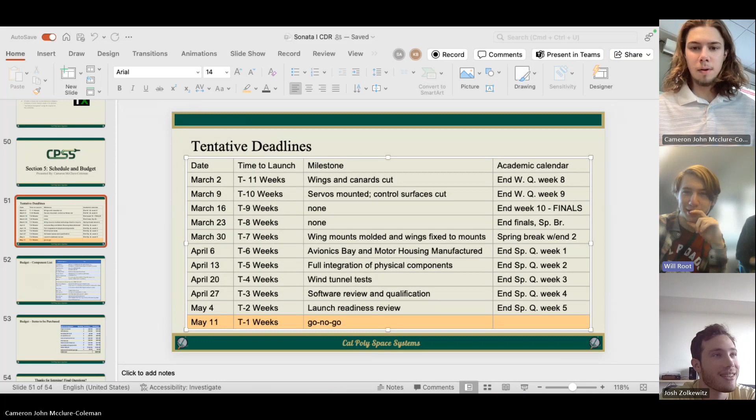I think so, yeah, can you see the PowerPoint? Yeah. Try hitting that present, like the sharing correct button. Here? No, bottom, on the bottom, it's like the one next to, ah, the book. Yeah, that one. Ah, there we go, cool.

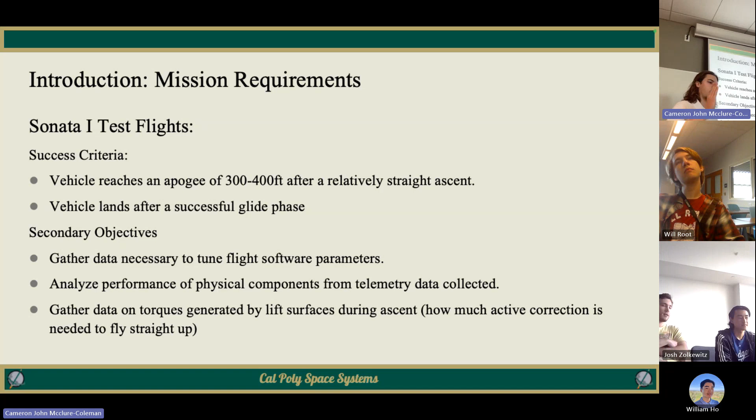Because if we were to put that on a rocket, we'd then have to generate extra drag by using our active control to stabilize it.

The idea is, background on plane versus rocket: for a plane, you want your CP to be closer to your CG. For a rocket, you want it to be further away, because when you're going up you want it further behind. So we're shooting for that on the way up, and then hoping that it will come back far enough that with the canards we can kind of cancel out how far away it is from the center of gravity.

By having canards so far forward, we can then pitch up with control surfaces on the canards when needed to maintain stability while in flight. But obviously we'll have to do testing of that, which we're hoping to do in the wind tunnel first, and then launch it with the actual rocket once we've confirmed that we can control it.

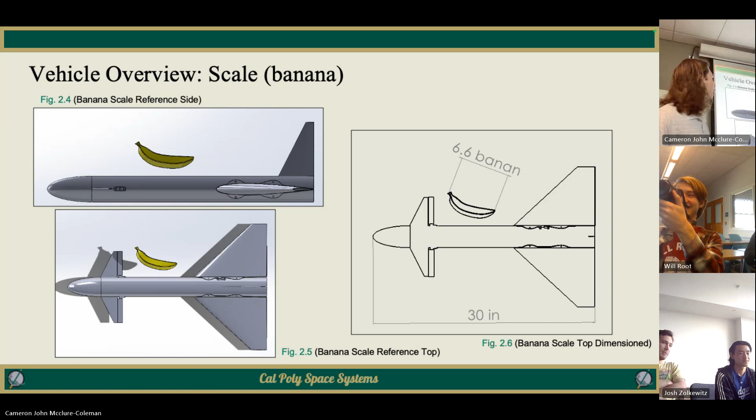Oh, I like how it puts a shadow in there. That's so cool. That's very cool. Oh sorry, you want to get a picture of that slide? Okay, great content.

Okay, vehicle overview. We covered this in the PDR, but we have some changes here that we'll go over again later.

Same as before, while on ascent the flight software will be configured to maintain our trajectory as straight up as possible. Hopefully we'll be able to have hands off the sticks, and then ground control station is just observing the video and spotting to make sure it's not going to die. And then electronic systems function as normal, so we'll get telemetry, video feed, data logging, all that.

So this brings up a question: is your flight software going to be able to handle both automatic guidance and then controlled input guidance? Yeah, so it's not automatic guidance as much as it is just stabilization. Just in case anybody is listening, it's stabilization, not guidance.

And I think what we're planning on using, I'll talk about in the flight software slide, is a software called ArduPilot. That's just firmware you can load on, and there's already libraries and stuff to support the flight controller we're using to do all that automatic stabilization. I'm not sure if it will transfer to going vertical, so that might have to be a custom plugin to make sure it can do vertical stabilization.

I would definitely be careful, because rocket stabilization is going to be a different control problem. Yep, it's inherently unstable.

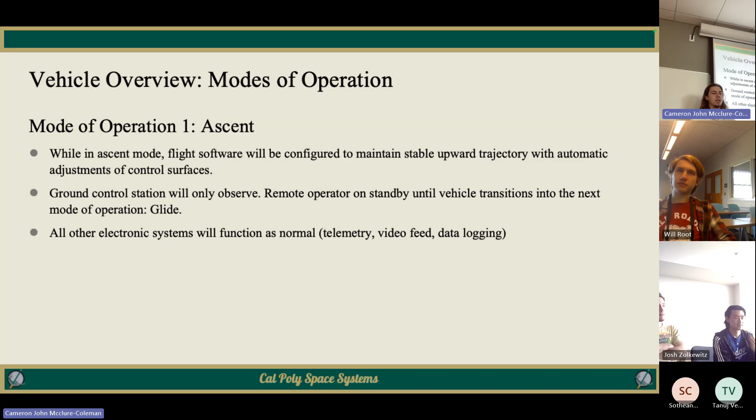The idea is that you just have it run the active stabilization in an upwards mode, and then you flick a switch into the normal glide mode, and then it uses whatever the normal active stabilization is that ArduPilot comes with, because it knows how to do that for planes and I don't.

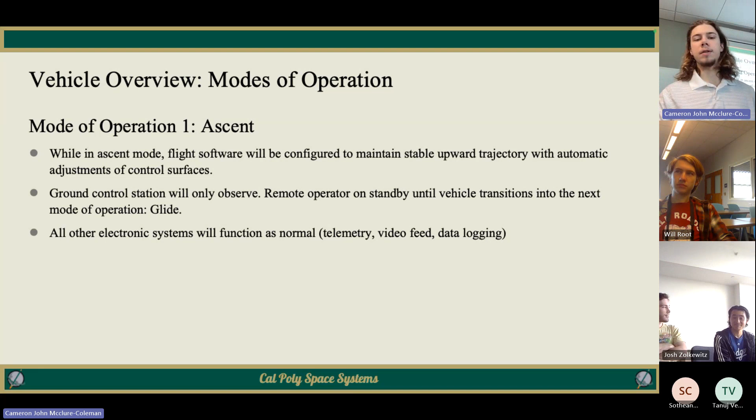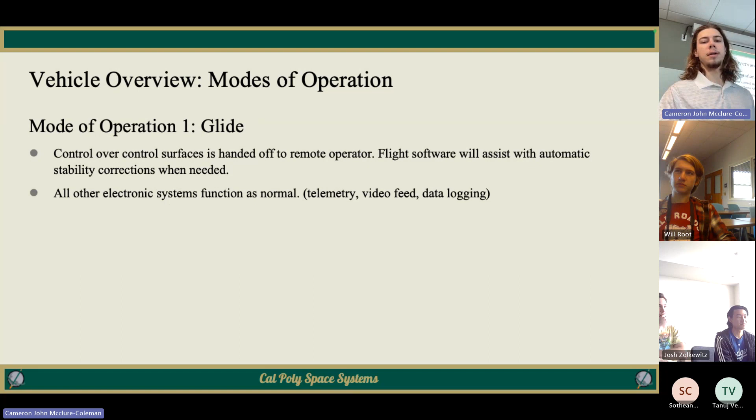Then the second mode of operation is glide — same thing, just a human in control now from a remote location, probably in a bunker.

Concept of operations is the same here, except last time we had an optional 'if we lose control, parachute deploys.' We ran some numbers — and we'll talk about this in a later slide — but if we're only getting up to about 300 feet, and the furthest away we'll be is about halfway down when we're coming in for landing, we'll only have about 100 feet to deploy a parachute. We figured it's not worth adding all that weight for something that may or may not actually save the rocket.

We'd rather just put everybody in a safe location. And if it crashes, it's under 3 pounds — it won't damage the tree it smacks into. So the environment is safe and we'll make sure the humans are safe.

We'll cover it a little bit in more detail. Basically, pad idle: we confirm that we have all the links we need over radio, confirm that range is clear, declare go for launch, and then ascent.

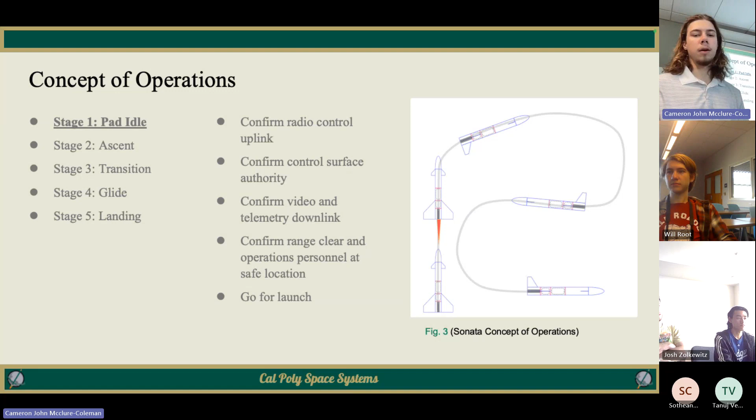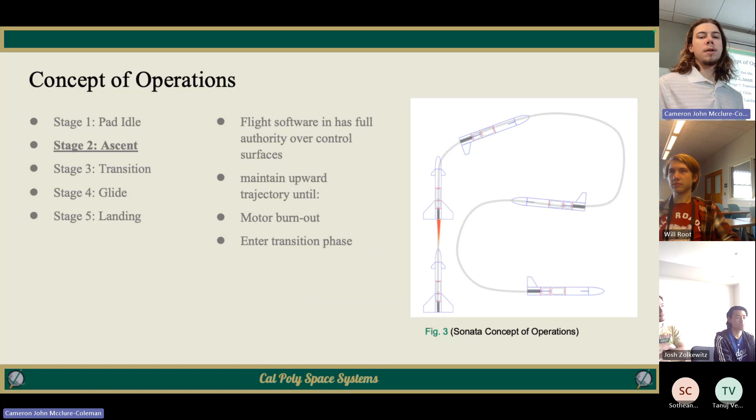For flight software and control, as I was just talking about, we maintain the upward trajectory until motor burnout, and then we enter the transition phase. The idea is to coast until we reach a safe airspeed to start maneuvering into glide conditions.

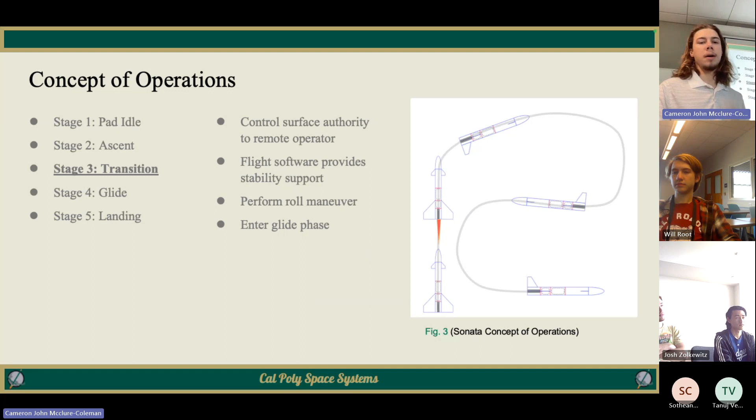That would be around 60 feet per second, we thought. Obviously we'll have to do some testing of how fast the airspeed can get before we get unstable, in the wind tunnel.

Then we go to the glide, maintaining under 50 miles per hour, which is what we're thinking will be safe in order to land it. That's what we're assuming — we'll obviously have to test that because we're not confident in the software fully, or that we were using the software correctly to determine that.

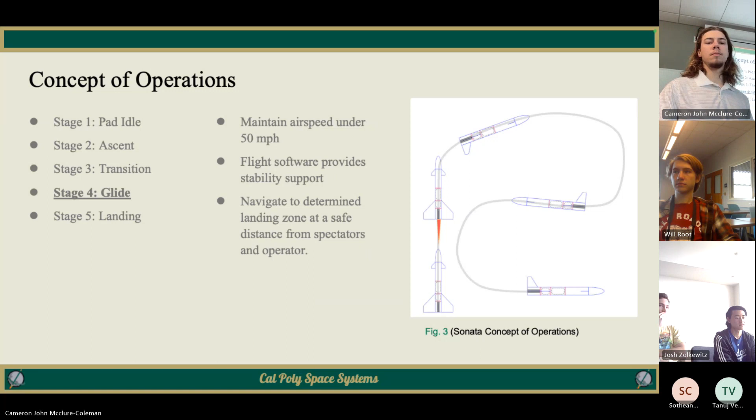And also, our manufacturing tolerances are definitely not going to be exactly what we've designed in our models. Then we glide to landing, and hopefully power down, recover — mission success.

Yay! All right, moving into subsystem overviews. Oh, question — sorry, move on. Yeah, I know. Yes, like what exactly?

We have a test matrix that we'll show for the wind tunnels and for launches, and then we'll also talk about that further. I have a schedule slide for our tentative schedule, and we'll talk about why it's tentative as well. So we'll go over that.

Here's our agenda for subsystem overviews. I will hand it over to Kyler for lift surfaces and control surfaces. Thank you.

Do I just use the arrow? Yeah, okay. Space works too.

Okay, so this is basically the same as PDR right now. We still have the same delta wing design as the old booster, same ratio that we're keeping for the shape. We decided on 2 wings — one symmetrical, and then we're gonna test a non-symmetrical airfoil to see if the auto stabilization can control that, which we'll also test with the wind tunnel.

I'll show this in the CAD, but basically it's the same as the old Starbooster. The wings are placed at the base of the booster for maximum stability, and then canards are ahead of that towards the nose cone. This is the symmetric airfoil we're using.

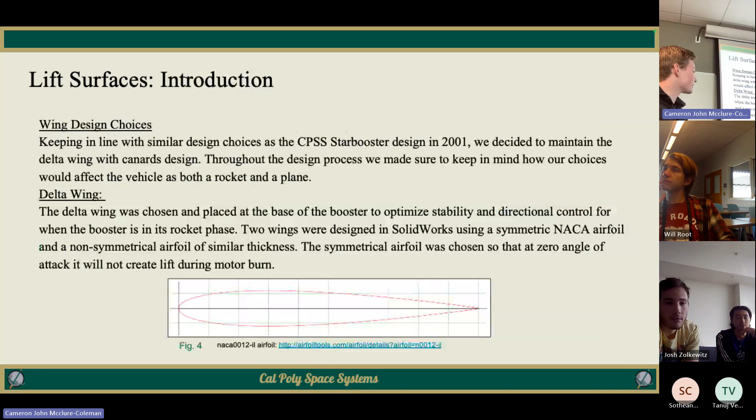We're trying to glide at around 9 meters per second, so I figured the safe stall speed should be below that. So going with what NACA gives for the coefficient of lift, and then the maximum angle of attack.

The wings are sized at around here. So basically, we're going for a stall speed of about 2 meters per second slower than the target glide speed for the symmetric wings, and a good bit lower than that for the non-symmetric wings.

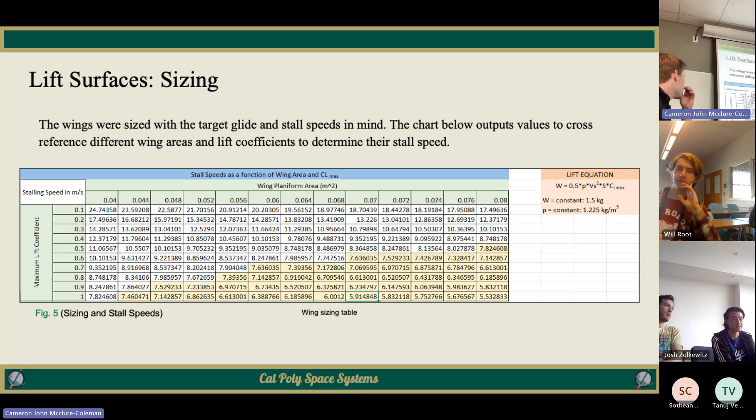I really like the analysis of finding the stall speed, but it might have been better illustrated in a graph. Also, the meters per second -- I know you put miles per hour earlier, and yeah, probably should aim to keep that constant. Okay, yeah, sorry, we probably switched the units around, but it's all the same thing.

So this, I didn't skip one. No, this is the non-symmetric airfoil. So here's all the fancy numbers for it -- basically coefficient of lift and drag for 5 to 10 degrees angle of attack.

There's the CAD model of one of the wings, and then the coefficient of lift versus the angle of attack that's given on the NACA website.

Is that surface area, planform area, or? Planform, yeah. That's the other reason -- I don't know, like 53.4 inches squared is meters squared, so between the two graphs it's hard to tell. I know, units, we should probably switch that up and make it all constant, but it's the same thing.

So yeah, again, a symmetric airfoil was used so that during launch it shouldn't tend to peel away. This would be the easiest way of doing it.

And then I calculated a rate of descent of about 0.52 feet per second. Realistically it's probably going to be a bit faster than that, but that's pretty good.

This airfoil we picked because I'd originally picked a thinner one, but after talking to DBF people, and then after PDR, we went with a thicker airfoil because it will probably be manufacturable, as opposed to the other one which we'd have a lot of difficulty actually cutting out.

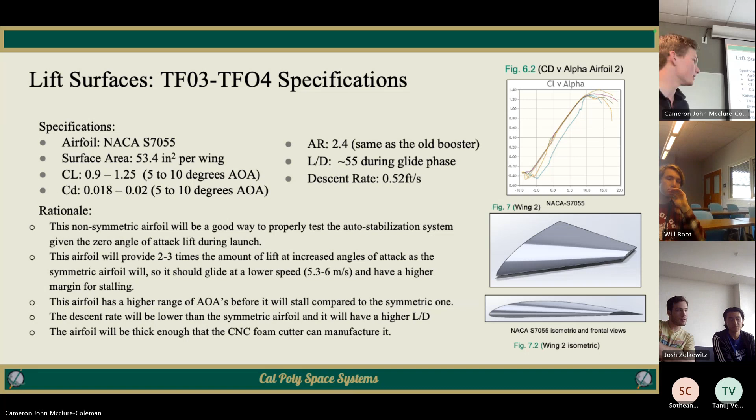Are we building 2 vehicles, each with one of these wings? No, just one vehicle -- I think it's on another slide -- but they can be attached modularly.

This is a wind tunnel test matrix we have. I didn't want to put so many words on here, so this is a general test matrix. Basically we're going to test the symmetric airfoil mounted with thin canards, and test drag, airflow over the wings and canards, and lift created with different elevator deflections. We're also going to do another test, but the original canard design I had would be too thin to manufacture, so that would probably just end up being a wedge.

But we also want to make thicker canards with an actual airfoil, though we aren't exactly sure how thin the CNC foam cutter can go. So after talking to DBF and figuring that out, we're going to make a thicker canard with an actual airfoil, but I'm just not sure how that would interfere with the airflow over the main wing.

That's something we want to test in the wind tunnel. Wind tunnel tests 3 and 4 are basically the same thing as the symmetric airfoil, but with the non-symmetric one.

The main points we want to get here are drag, and for the non-symmetric airfoil, lift created at zero angle of attack, and seeing if the control surfaces can overcome that -- so that active stabilization could actually keep it straight, as opposed to the control surfaces not being enough to overcome the lift during launch.

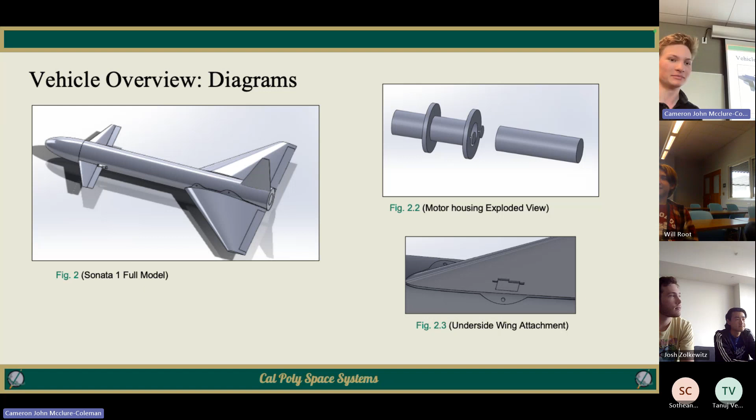Oh sorry, for that, that's like 50% to 100% of the wind tunnel speed, not our actual speed. And I was just gonna try to fit a curve to that. Gotcha, all right, makes sense.

Would you do something to try and, I don't know, maybe scale up your test model in the wind tunnel so that even at lower wind speeds you can still try to get a bit more information out of it? What do you mean, scale? Like make a bigger model, just so you can keep the Reynolds number the same, and even with the lower wind speed, try to predict what it's going to be at faster speeds for a smaller model, if that makes sense.

Well, I don't think we can make it much bigger because the test section of the wind tunnel is not massive. I think our rocket will fit in the wind tunnel, and that's about as big as we can fit. Got it, okay, that makes sense.

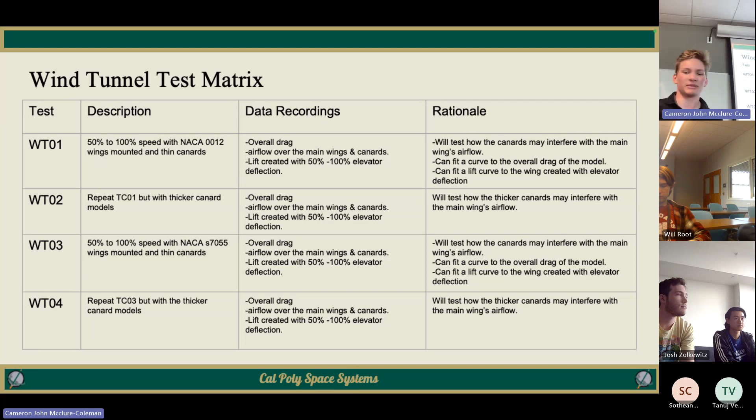Yeah, because I guess the main question is what the Reynolds number difference is going to be. Are you going to be able to match the Reynolds number and create flight-like conditions you'd expect to see in glide or in flight? It's probably not going to be perfect, but it's something to know, like what Reynolds number you're going to be running at versus what you're expecting to see in flight, and then what Reynolds number you're actually testing at, so you can at least see where your discrepancy is going to be.

Okay, yeah, I was definitely hoping to get some help on the wind tunnel stuff because I've never done that before.

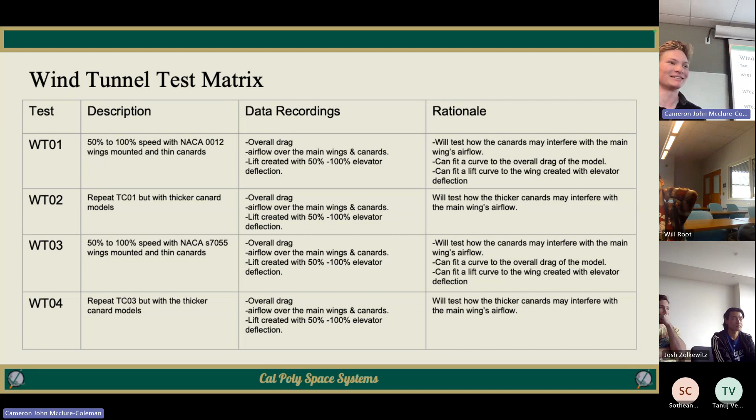And then again, launch test matrix. I realize this is kind of wordy, but the data recordings are just copy paste the same thing. So we're gonna do 4 launches, 2 for each wing configuration.

We're basically just testing launch without active stabilization, and then launch with it, for the symmetric, and then 2 launches for the non-symmetric airfoil. One launch to basically gain some data to see did the stabilizing work, and then we might need to tweak it and try again.

And then we're gonna record maximum apogee, maximum launch velocity, glide speed, and handling feedback and flight time basically, and then we can compare it to open rocket, and that'll tell us if it's actually being very accurate or not.

Obviously, if it crashes, we will rebuild it and then fly again. That's the plan.

Yeah, and then a brief overview of the other lift surfaces. So the canards were again sized pretty similarly to the old booster. They're about 15% of the size of the wings.

And then yeah, this is just saying about what I was saying about manufacturing them. So we're gonna make basically a wedge, and then one with an airfoil.

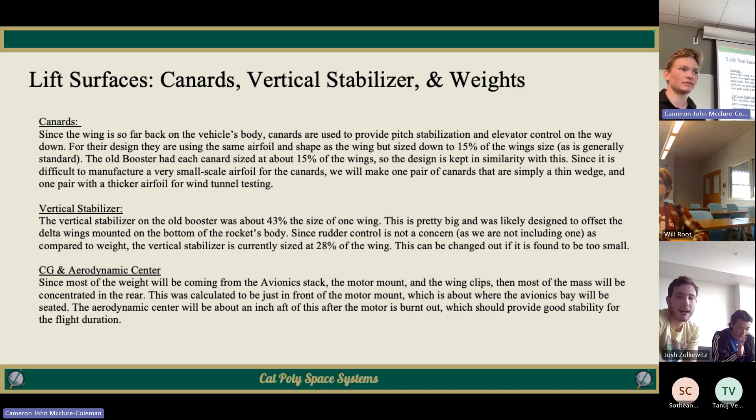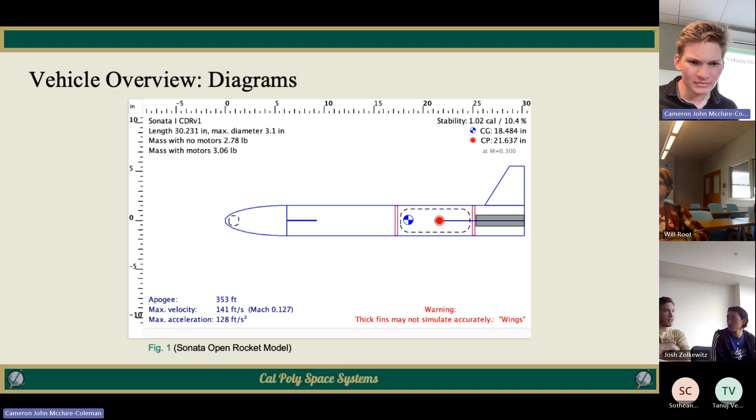Do you have a large... what's your percentage of the master rocket weight? It's like, again, under 300 grams is what we were limited to, so it's pretty small. We go from 3.06 pounds to 2.7 pounds, so I don't know what the percentage of that is, but yeah, it's not a lot.

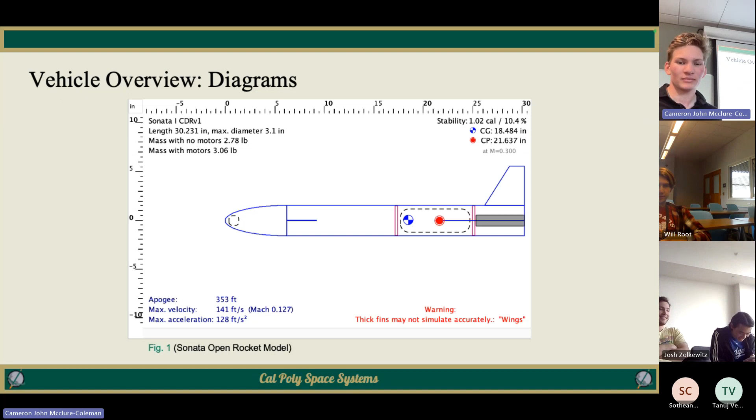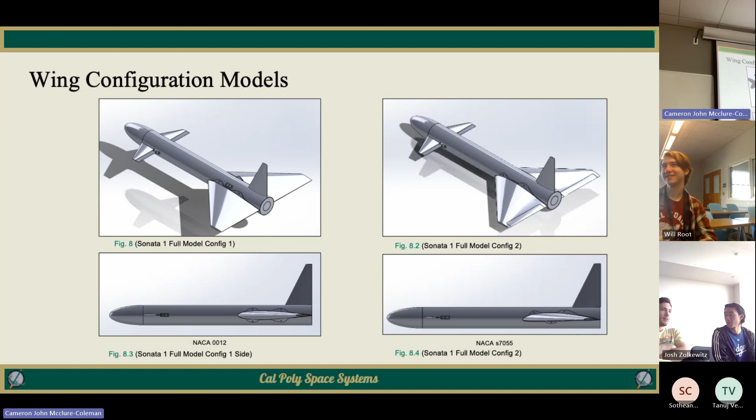And then here's just an image of the CAD models of the two wings. I think we have slides going on, but basically it's just, we're making wing mounts, so ignore the servos in here, they're going in the wings. We're making these fiberglass wing mounts that we're going to attach to the wing so that we can screw them on.

And then we picked these servos because they recommended we use metal ones, since they kept having gear shearing issues during the old Star Booster. So basically, the smallest servo we could find within our price range that had metal gears. I also picked them based on this RC plane servo torque calculator, which for our purposes ended up showing that all of the servos create way more torque than we would really need.

But yeah, so we're going to stick them in the wings because that's the easiest way to connect them to the control surfaces. Cameron has a model RC plane and it has attachment points. I think you're talking about that for the wiring, but that's what we're going to do.

So the ailerons are about 12% of the size of the wing, and the elevators are 20% the size of the canards... that's again similar to how the old Star Booster was. Also something we're going to test if that's good or not with the wind tunnel. And then we've already talked about controls a lot.

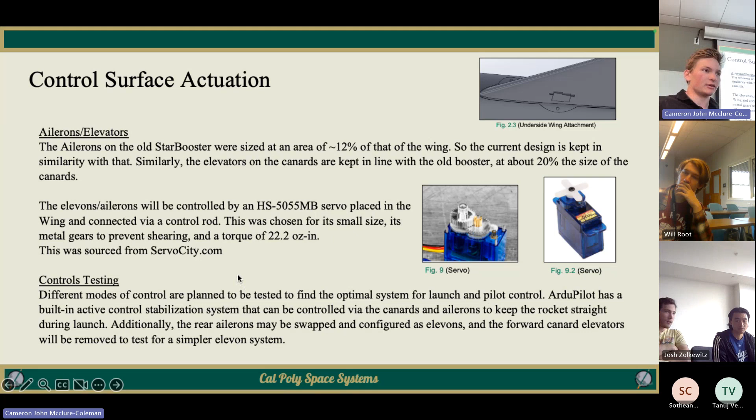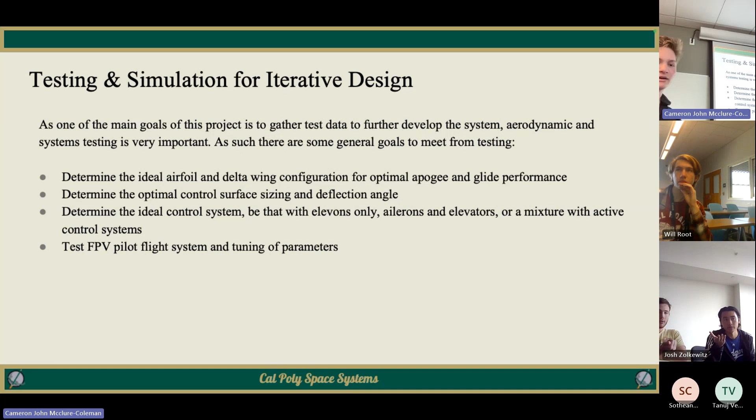Testing different control systems that ArduPilot has to support. And then this is just the servo torque calculator. Basically a summary of everything I'm saying with the testing. So overall, to decide from our testing: pick the ideal airfoil and delta wing configuration, optimal control surface sizing and deflection angle for that, and then the best control system. Not on here, but I guess also to see how accurate Open Rocket is, and then test the pilot system.

Okay, yes, the servo, this... this is basically just a calculation to decide how much torque you need the servo to generate, based on the size of your control surface, how much the control surface will be deflecting, and how many degrees the servo will turn.

Is that 8.5e-6 just to take the centimeters to the fourth times miles per hour, or centimeters cubed times miles per hour? Probably, I don't know, I didn't make this. Oops, I can't go at it. I didn't design this equation, but looking at it, probably.

So are you citing that based off of launch or based off of flight? Launch. Okay, so are we expecting to actuate the servos during launch? It doesn't seem like we are, so.

Well, if the active stabilization is going to be used, are we gonna use, or even use the canards? That was kind of assuming we use the canards. Well, sorry, I'm counting the canards as a control surface. Oh, okay.

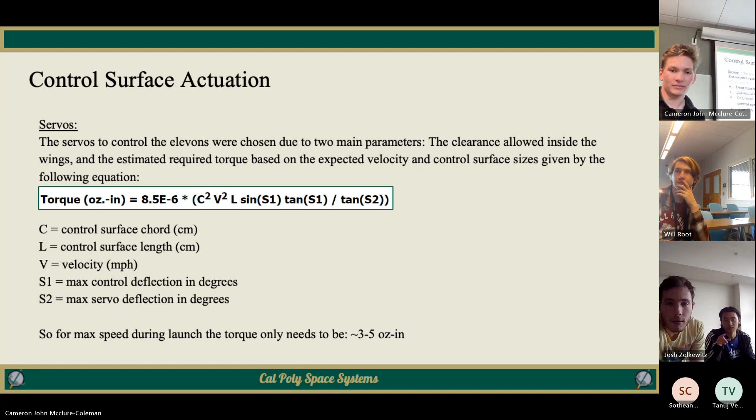But yeah, the full wing ones might be a little overkill for that, especially going that fast.

Yeah, for the airfoils, I was wondering how you got the parameters, like lift to drag ratio, lift coefficient versus angle of attack that provided. Wait, oh, that chart. Yeah, and the lift to drag ratio. Yeah, that's all on the NACA website. They just have that listed automatically for every airfoil. It's basically just coming from Xfoil.

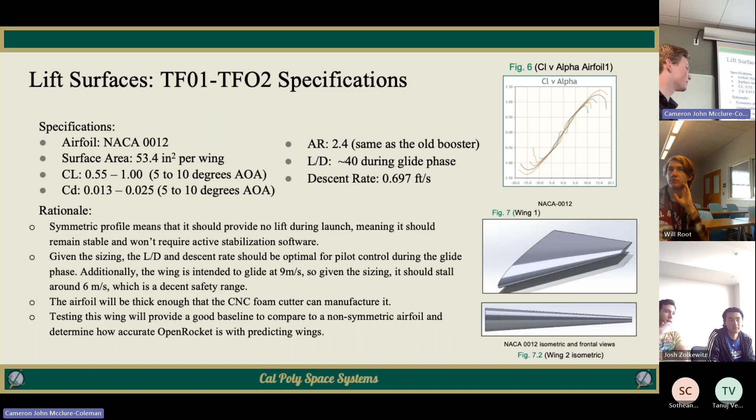Why does it look weird or something? I was thinking the lift to drag ratio seemed a bit high, but... Yeah, I think if you do that for the entire vehicle instead of just the airfoil, perhaps... no, that's just based on the airfoil, but for the entire vehicle, I don't know.

Well... how does the shuttle fly? That thing just falls. Okay, other questions? I don't know. Okay, Spencer, your turn.

Okay, so now on to structures and recovery. So we start with the main body. So just like PDR, we are still making it out of a cardboard tube, common in low-class rocket models.

It'll be around a 3-inch inner diameter and a 3.1-inch outer diameter. This is just what we're buying off of the internet, so those are their weird dimensions. It's kind of what we're left with. We're gonna buy a 3-foot long tube and cut it down to size.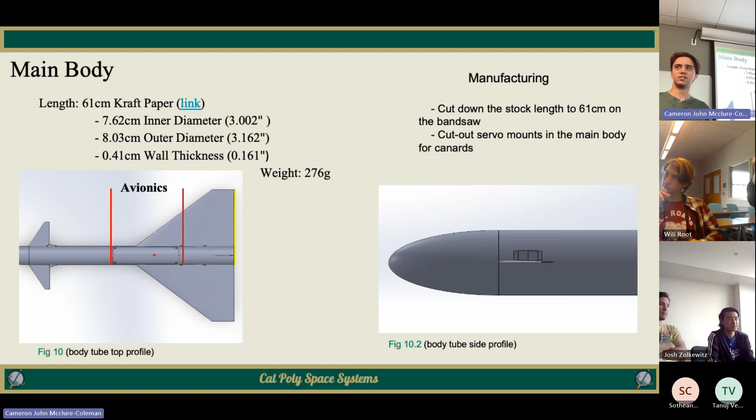Just kind of a sanity check, like you're probably gonna get a factor of safety of like 30 or something, wild. But just making sure that when you start cutting a bunch of holes in your tube, you're not gonna accidentally knock down your strength. Yeah, okay. We'll definitely look at that.

For our nose cone, it's gonna be around 15.7 centimeters, just because it's an elliptical shape, just for ease of manufacturing.

We're also deciding to put a mount for a camera inside the nose cone itself, since we plan on 3D printing it out of PETG filament, which should be strong enough as well. We need to do a little bit of calculations on that, but as far as we're aware, it will work.

And it'll be a lot easier to manufacture with that mount already attached so that we can just slip the camera inside. Total, that'll come around to 80 grams, 5 of which are the camera, so a super light RunCam camera that we'll talk about more later. We're planning on just making it out, and we can, if we need to, make multiple iterations of the design since it's really easy to manufacture, and just test and see.

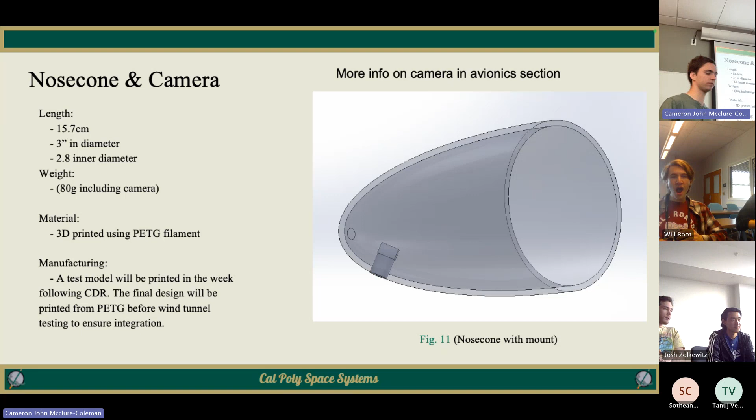We should. And also, from our camera, we'll be running a wire down the main body tube into the avionics bay to get that live video feed back down to the ground during flight.

For our wings, we are going to use EPS foam because we have that already, so we don't have to buy anything new. We're reinforcing them with a carbon fiber spar of about a quarter inch. We're not 100% sure on diameter or dimensions, but we have them around. DBF has a bunch, so we're planning on using some of theirs.

For manufacturing, we are making, as we said, two wing designs, and the canards will be the same on both iterations. So we're planning on using their CNC foam cutter to create the profile for both wings, which to our knowledge should be doable.

We did scale up the wings from PDR, so we're going to cut from a 1 inch thick foam stock down to about 3/4 inches at its maximum width.

Our wings are going to be attached to the main body with a wing mount that we'll talk about more in the next slide. We're planning on attaching the spar to that mount itself and then being able to slide the wings on and off for each iteration.

We're also going to be attaching the servos on the underside of the main wing, kind of in this picture over here. So we're going to run a wire through the side mount and along the bottom of the wing that will cut out into a little mount for the servo itself in the wing.

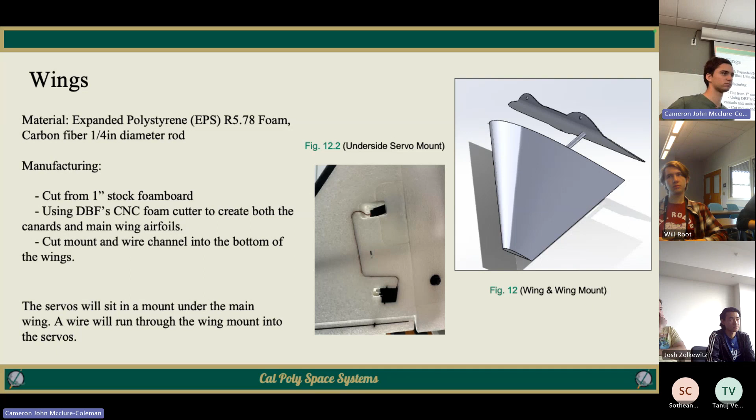I didn't touch that typo, but it's 1.5 stock foam board. More room to play with because the hot wire cutter melts quite a bit of the material, so we need more area to play with in the stock. But yeah, what we have already, so it shouldn't be any issue.

For the actual mount itself, after PDR we decided to change it to a fiberglass mount. What we're planning on doing is taking a 1/8 inch fiberglass sheet and heat forming it to the body of the tube itself to get that nice cut, and then cutting out our shape.

We're attaching it with 4 screws into the main body, and then the wing will slide onto this mount itself.

Are you just assuming you'll be able to screw into the tube itself, or will you have a nut? We're going to epoxy nuts onto the inside of the body tube so you can screw into those. So we'll have 4 of those on each side, plus additional ones for the canard as well.

Are you planning on cutting the fiberglass? Just cutting it. We could also do a layup, but it would probably be easier if we can get this cut with a drill.

Also, do we know if 4 bolts is enough? Calculate that, help us. The wing is very light, it's all foam, so it's not about the weight, but obviously they're...

So this is going to be pure shear, assuming... how big are your screws? Size 6. Yeah, this is like...

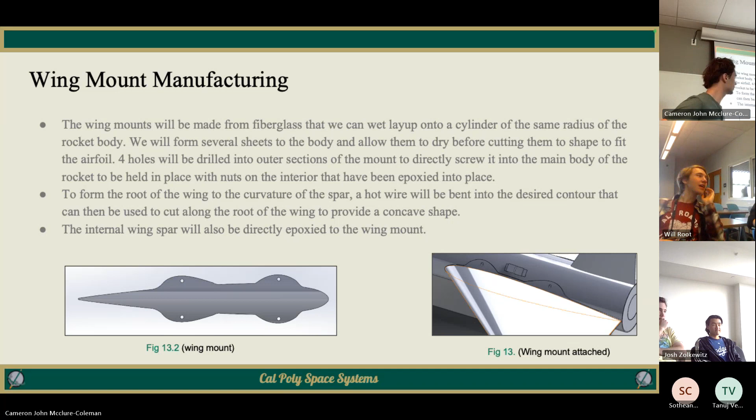For our avionics bay, which sits in the middle of the rocket, we're planning on creating a little hatch to access it from the top in case we need to change stuff out. Between both configurations, we need to change out the servo connection in the wings because we're changing the wings themselves, so we want access to the avionics bay in case we need to change anything.

So what we're planning on doing is having two centering rings on either side of the avionics bay, which is about 8 inches in length. Those are going to be glued down into the main body tube. They'll fit pretty exactly, and we're just gonna cut them out of plywood or something feasible we can drill or screw into, something lightweight.

Another thing with tolerancing, like... yeah, don't put 3.0 or... yeah, I get it. No, a lot of our tolerances and sizes are just kind of whatever ends up happening.

We don't expect, with our wings, we're not sure at all how much is going to be cut off with the foam cutter or how much to account for, so we're kind of just waiting to see what happens, and adjusting if we need to. I just did that because it's the same diameter, but in reality it should be a bit smaller.

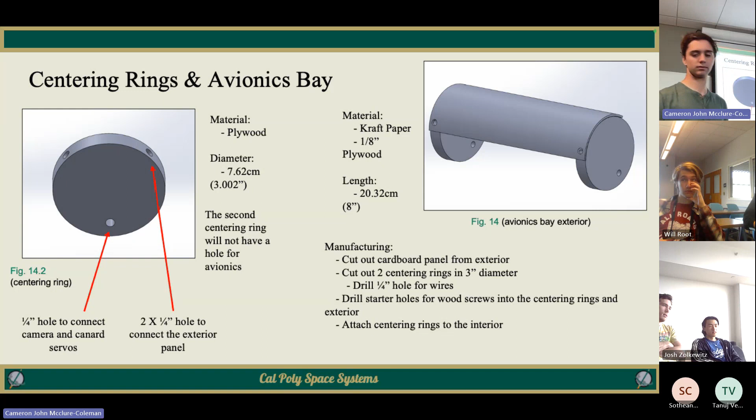For our motor mount, we have the motor itself and the casing that we're gonna be buying online. We want to make a little mount to slide into, because the motor comes with a casing at the front for a secondary charge, which you'd use if you wanted to eject a parachute out of the nose cone, but we don't need that for anything. It's still part of the casing we get.

So we want to just make a solid tube we can slide it into, and put a centering ring around that. We were hoping we could 3D print that as well, so this main tube and the centering ring would be all one structure that we can just slide in and lock in.

And then this ring here and these screws or something to hold the motor in, just while we're handling it and stuff. During flight, the pressure should keep it in, but just in case. And during the glide phase, we don't know - I mean, no forces should be acting on it, but just in case.

Which motor are you using? I think it was in... that motor. Yeah.

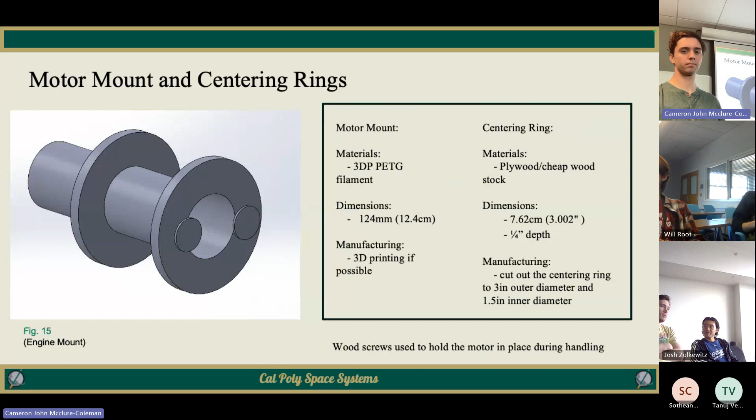So then, launching - we are still kind of deciding or figuring out where we're gonna actually be launching from, so it's a little up in the air of how we actually launch it. But one of our ideas is to stick it on what would be two launch rails. We probably only actually need one, but we want to have, if we're using launch lugs, them on either side of the tube, so we have two of them to account for when we land the plane again, because depending on where we launch, we could be landing on harder pavement.

If we land on the grass, it won't be a problem at all, and we'll probably just be able to launch it straight off the back with one rail. But in case we have to land on pavement, we want some sort of protection on the bottom to slow it down and grip, and also for more surface stability. If we're landing on one tube on the bottom, it's going to roll, and that pressure gets put on the wings.

We would try to avoid that. I'd avoid launching off two rails. We don't think we'll launch off two rails, but we think still launching like this, but maybe having something on both sides. Maybe you can just 3D print or epoxy on some skids, something aerodynamic, if that's a concern.

The main thing is that if you're launching off two rails and have any sort of thrust imbalance, you're going to start to bind your launch lugs. It's hard enough to line up two, and if you have multiple launch lugs, you have to align them axially and make sure they're radially concentric. That presents a lot of challenge and can add friction so you don't actually reach your stable velocity off the rail.

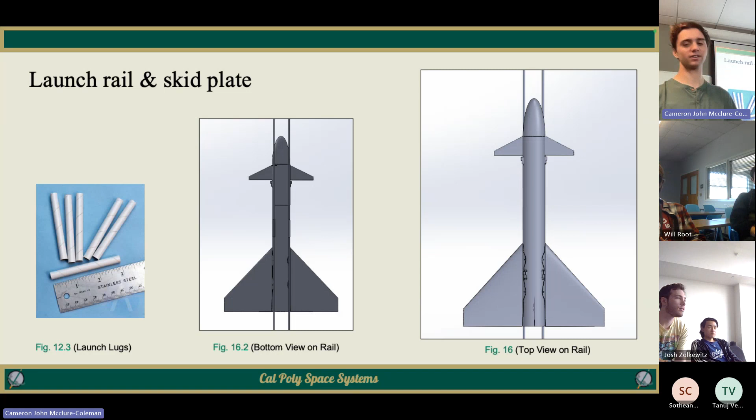All right, let's talk about the recovery system a little bit and why we decided to forego the parachute. From PDR, we originally thought the parachute would have to sit a bit further up from the back and launch either at the top or bottom of the rocket, since we couldn't fit anything next to the motor without offsetting it, and we didn't want to deal with that.

But after talking with some people and getting feedback from PDR, we thought it might not be super important to have parachute recovery, or that it might not even be feasible in the first place. As we stated before, our max altitude is going to be well below 400 feet realistically, with a pretty quick rate of descent — these are under ideal conditions, but it'll probably be very fast.

In most scenarios where we'd deploy our parachute, we're going to be around 100 to 200 feet above ground, and these are all scenarios where we've lost control of the vehicle. The deployment time and the amount of added mass just don't make sense. So instead, depending on where we launch, we're hoping to take shelter in a bunker or clear the area in the event we lose control. If for whatever reason it keeps gliding, it might go half a mile, but it's only a 3-pound vehicle, so it won't do too much damage if it crashes, as long as it's not crashing into people.

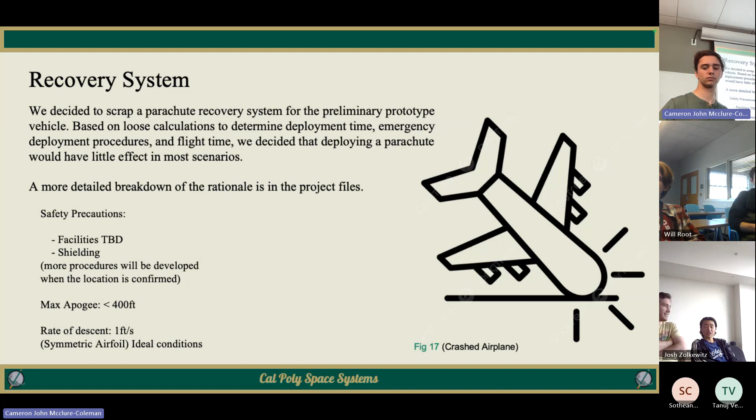There's more rationale and numbers on a separate write-up of why we decided not to include it, which you can find. I think that's the last slide.

Ready? Hello. Thank you, Spencer. This is just a picture we talked about already, so we can go over it a little bit again.

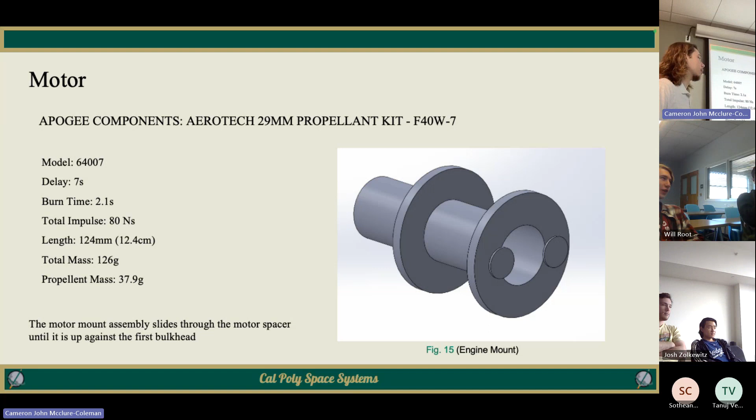That's the propellant there. It's like a reloadable kit you can put in and out of your motor casing, which we're also buying, or I think we have some in the hangar. We can use one of those, and we'll get like 4 or 5 motors in case one's broken or we want to do another test. Just load them into the casing and go.

Now I'm going to move on to avionics and radio control. None of this has changed since PDR if you were here, so I'll go over it quickly.

We're using this flight controller because it has all the pinouts we need for GPS, airspeed, and pitot tube, already preset, and it has the flight control firmware we're using, with a profile already set up in that software to control all those things.

I heard pitot tube—are you having a pitot tube? On the wing. We'll talk about that in one of the slides. It comes with a tube that we run out of the avionics bay to wherever we're mounting it, which will be on the wing, making sure it's outside the boundary layer.

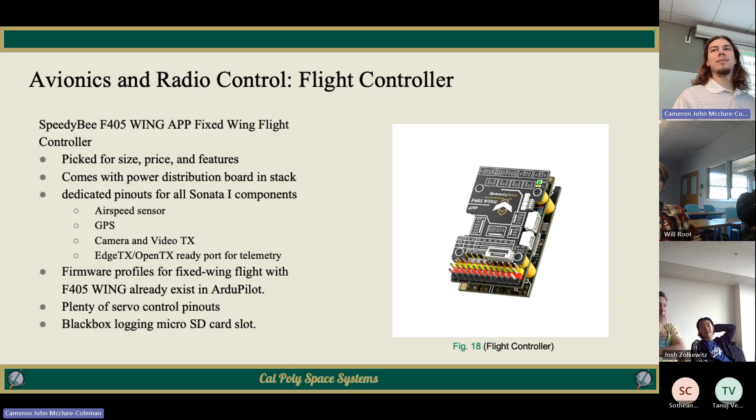There is a caveat: we have to make sure we set the firmware settings to output the right voltage for all these things, which you can actually do from your phone—it has Bluetooth, which is kind of crazy.

We have a receiver for control that runs over the ELRS protocol, just an easy, pre-built protocol.

I'm turning it off—oh my gosh, Discord, go away. I don't know how to turn that off. Sorry. Good Discord. That's on my Mac computer, yeah.

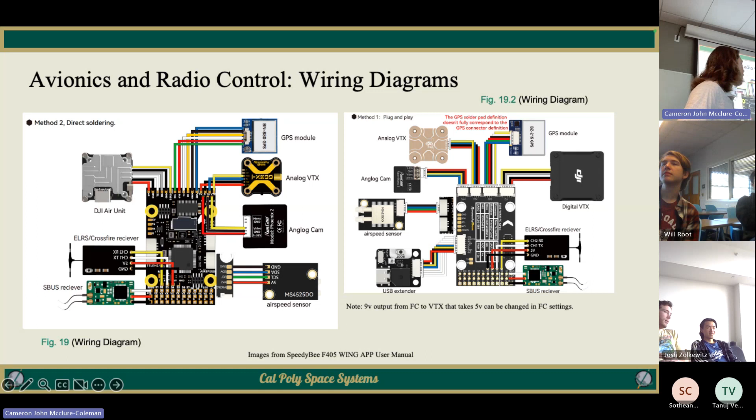There's the USB extender here that just plugs right in, and you plug it into your computer to load the firmware and change settings. So it's pretty easy—the idea was ease of use and ease of accessing the software. We didn't want to build our own PCBs and deal with manufacturing issues as well as software issues. We just want to be able to plug in and write some code if needed, but mostly just press some buttons and trust that it works, or blame somebody else if it doesn't.

If in the future we want to try doing autonomous return of the booster, we can try that with Mission Planner, which is developed to work with ArduPilot.

Also, if we want to test stuff, we've been trying to get OpenMCT working as a ground control display for our other rockets, but we could test it here because ArduPilot and Mission Planner have pretty extensive documentation for integrating with OpenMCT. We can hopefully do that easily and test how we want to build solutions for this, then make them adaptable to other projects at CPSS.

These are more long-term goals, but the reasoning for choosing ArduPilot was because it worked with these two pretty easily.